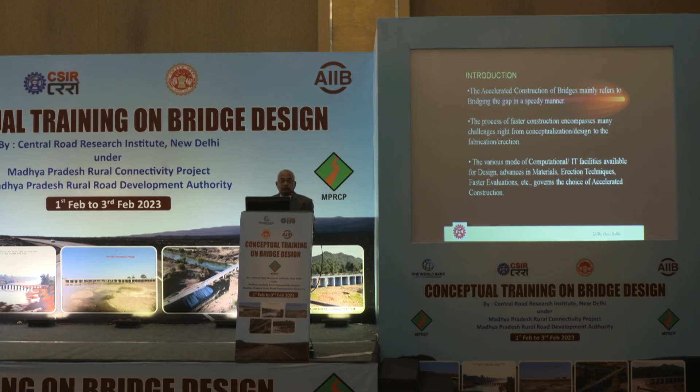Now, because of the various computational IT facilities available for design, advanced materials, erection techniques, and faster evaluations, all these factors govern the choice of accelerated construction, depending on the resources that you have.

On the basis of the resources, you can think of the type of material, like steel, composite, high performance concrete, or high grade steel. All these material advances govern the type of construction.

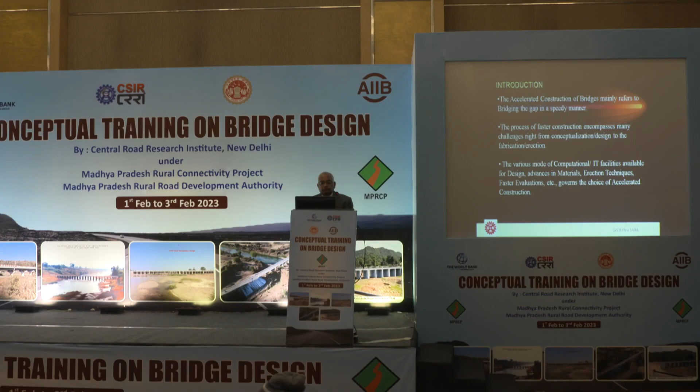IT facilities are very important because earlier we did not have fast computation methods. Nowadays we have very sophisticated software backed by IT tools and faster generations of computers. All these things make it very easy to implement such construction at site.

Obviously, when all these combinations come together, they give you the very good aesthetic appeal that you can always see.

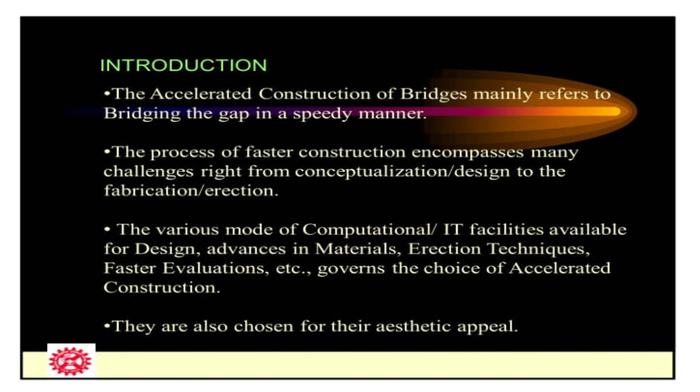Type of construction means segmental, built one by one in smaller segments of something like 3 to 4 meters in length or width, depending on the width of the carriageway - 2 lane, 4 lane, or 6 lane. For up to 6 lanes, you can go up to 14.5 or 15 meter segments, or even wider depending on the design and ease of construction.

Launching mechanism is very important because whatever segment you design, it should fit your cross section, and we have to see what launching mechanism is adaptable for that particular design. It all depends on handling convenience and the space available at site, since you have to construct in urban areas, at junctions, near ROBs, or railway crossings. All these locations create difficulty in deciding the launching mechanism because of space constraints.

Material should obviously have quick, long-lasting setting, extra high strength, and good evaluations. This is very important because it's one aspect where you have to maintain very good construction control, otherwise you may find both ends not meeting at the end of the day.

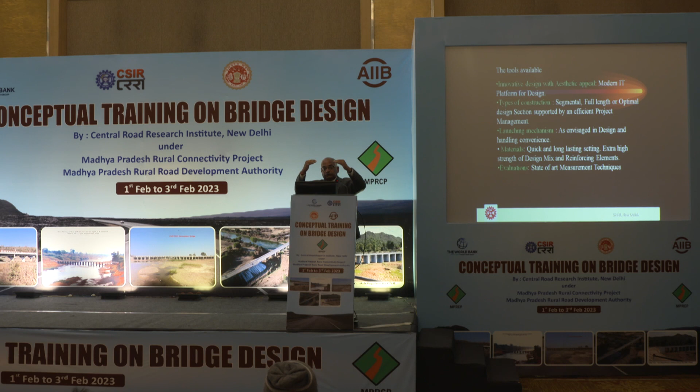You would have seen certain photographs on WhatsApp or elsewhere of bridges being constructed segment by segment, and when you reach the end, it should meet perfectly. If your measurement techniques are not good, or you're not able to control the construction sequence or the coordinates, both ends sometimes do not meet - then you have to make adjustments.

A lot of things go into the design also, because in a long span bridge, like 100 meters coming from that side and 100 meters from this side, a lot of shrinkage happens along the way. So you have to consider all these factors to make sure the meeting point comes close.

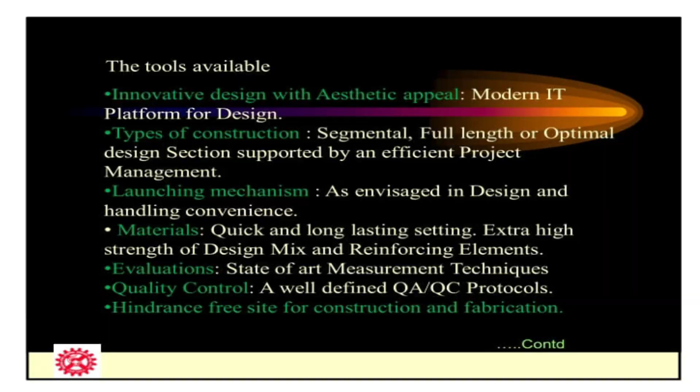Quality control, of course, you should have good QA/QC protocols. A hindrance-free site, as I told you—whatever site you select, it should be hindrance-free. It should also be safe from the traffic perspective, so that it does not cause any accident or loss of life.

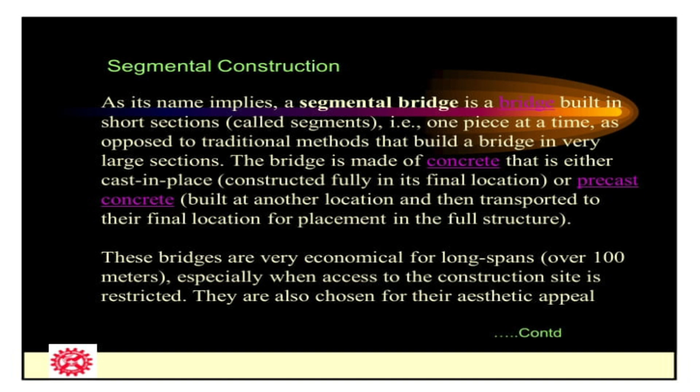As the name implies, a segmental bridge is a bridge built in short sections called segments, made of either steel, precast concrete, purely concrete, or composite material—any kind suited for the bridge location. As a thumb rule, these bridges are very economical over 100-meter spans, basically long spans.

We consider long spans for segmental construction, like balanced cantilever bridges—normally 65 meters on each side, meaning 130 meters total. So invariably you can find balanced cantilever bridges constructed across, for example, the Thane Creek Bridge in Bombay, or the Nivedita Bridge in Kolkata, where I was the project director in NHAI. I will show that example. All these bridges offer very good span lengths.

People thought, after the Second World War, that we should have faster connections, like in Europe. Europe was all fragmented into different segments, but after the Second World War, they became united. Unity doesn't come just like that—you have to have connections. Since there are large valleys separated by seas, they needed to connect them, so they thought of this technology after the Second World War. That is how all this advancement took place.

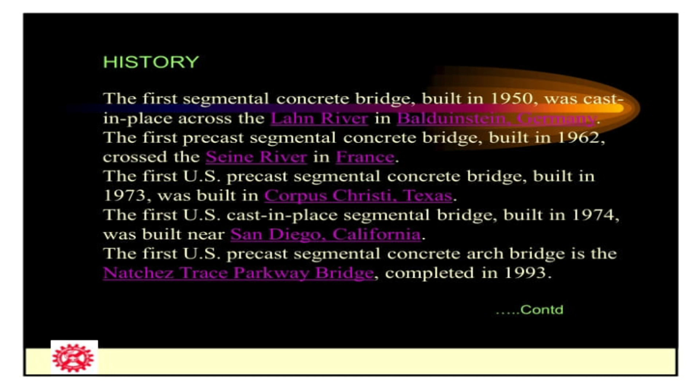Precast segments came in 1993, but this technology was basically developed long ago—it's not new. In India, if you look at our old historical temples, like in South India, they are also segmentally constructed. Imagine the Madurai temple, where they built segment by segment at the top, because there was no natural material like rock available. It was all constructed by our ancestors, and those technologies were available because they also had good construction control. Our old ancient Hindu temples had very advanced technology. At that time they did not have surveying equipment, but they definitely had something to control the construction.

In the 19th century and early developments, iron and steel truss bridge builders developed a method of constructing large bridges without the use of falsework. Nowadays we use a lot of falsework or erection technology, but in earlier days, they used permanent works as the falsework—they kept adding permanent works, and that became the structure. From that point onward, they started constructing the bridge, and the only precaution they took was to avoid tipping at the midpoints.

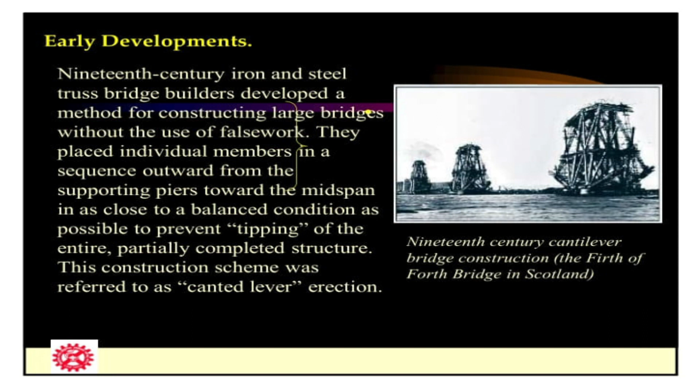In the 20th century, this cantilever method of building prestressed concrete bridges was developed. In India particularly, these balanced cantilever bridges used what is called Russian technology, where from 1971 to 1978, all these balanced cantilever bridges were constructed. It was a fashion at that time in the ministry to have balanced cantilever prestressed concrete bridges. I'll just skip this slide—you can look at it yourself.

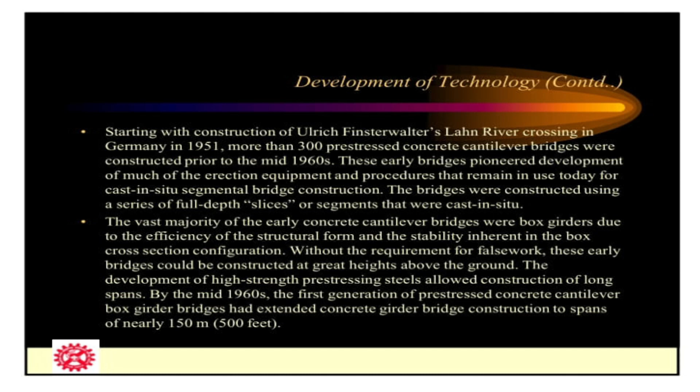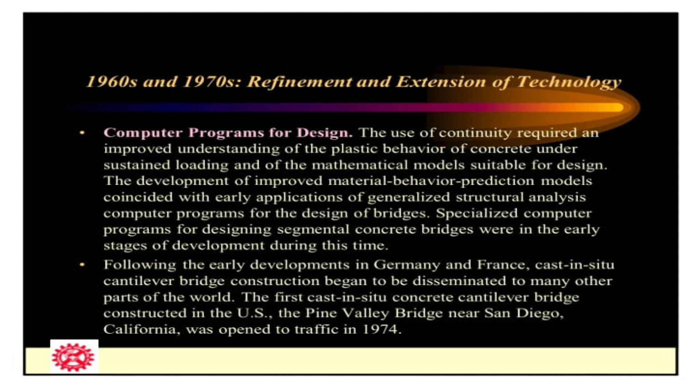After the 70s, people thought 150 meters is not enough—we should have even larger spans. But then the computational challenge comes in. You always have numerical methods, and they used to compute by hand. But for very large spans, like more than 200 or 300 meters center to center, they realized we need computational tools in hand to go for even larger spans. As computational technology improved after the 70s, a lot of new software started developing, and the computer age was also getting modified. This really facilitated computational methods and the implementation of bridges. Precasting, of course, offers a very good solution.

Because they can have good quality control in the plant.

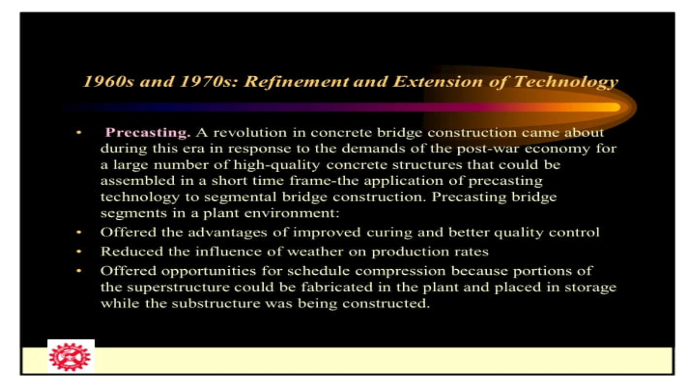Another challenge was how to transport precast segments to the site. This was a great challenge in India about 10 to 15 years back, because you have to have trailers something like 25 to 30 meters long to carry the segments, since your segment width for a 6-lane segment is almost 24 to 25 meters wide. So how to carry those segments?

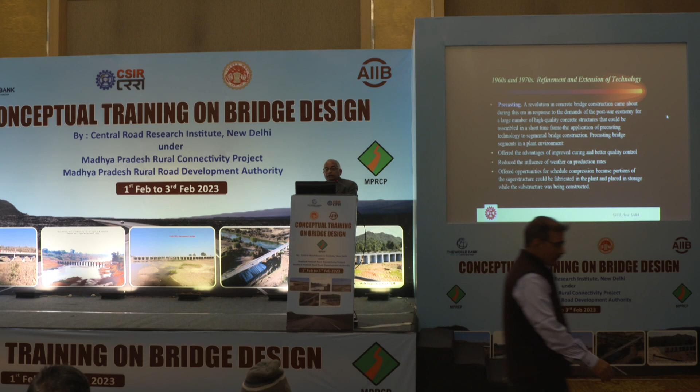I still remember when flyovers were constructed in Delhi in the middle of the 90s, we did not have a launching mechanism more than 25 meters. Imagine, there was no crane available in Delhi which could launch a single girder of more than 25 to 30 meters. That's the constraint we faced.

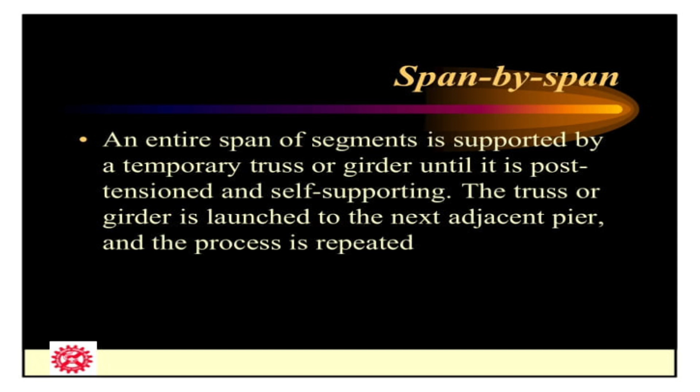So that is how the technology evolved. Now we are easily doing construction methods like span by span. This is the method where the entire span of segment is supported by a temporary truss or girder until it is post-tensioned and self-supporting, because then we take the advantage of pre-stressing. So you have a total span, one span of 25 to 30 meters, the entire span in one go, put it on the support, first temporary then permanent, and then pre-stress it, span by span.

You have the full truss giving full load on the piers. So piers have to be designed for that, because this is a design challenge - it has to handle both the temporary load during erection and then the permanent loads. So you have to design that way.

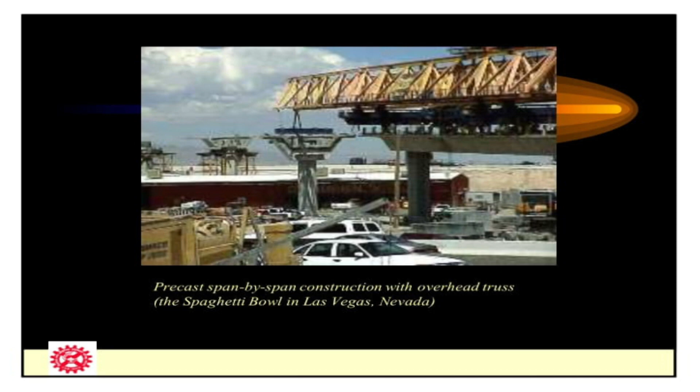And then you look at the traffic below. This is the challenge - God forbid an accident happens, but we engineers take the challenge, whatever it comes to. It has happened in Las Vegas, Nevada, US. Fortunately no accident happened, but it gives you the confidence that we can construct the bridge while not stopping the traffic also. That's the confidence one should have.

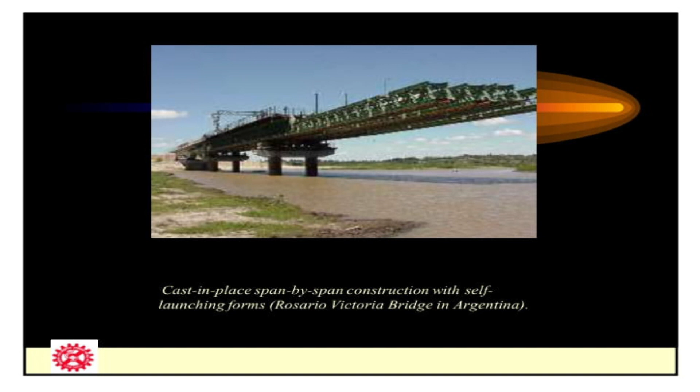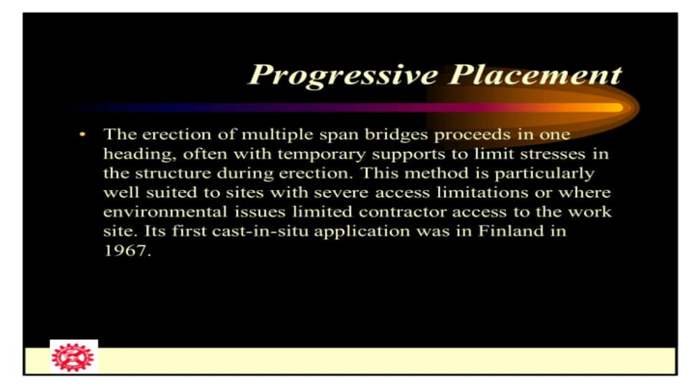Then there's cast-in-place span by span, like when you have a gantry available, you just move your truss and put it in place. Then progressive placement with multiple spans, where you're able to put multiple spans in one heading. Then incremental launching, with multiple spans one by one. I'll show an example rather than spend much time here.

Recently we had the bridge at Chenab, on river Chenab - this is the world's highest bridge in India. It is more than the height of... it's not that bridge, it's a different bridge. I could have included that slide but I have not. So that's one challenge India has accomplished.

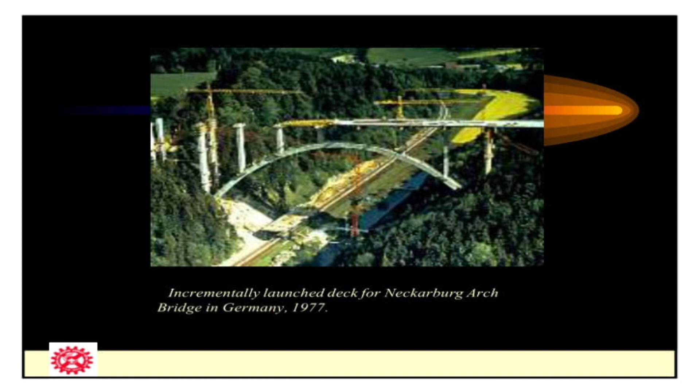So the normal sequence goes like: build the support towers and columns, build the temporary false work because you need temporary supports, then build the deck and perform the finishing work. If it is designed as pre-stressed, then go for post-tensioning.

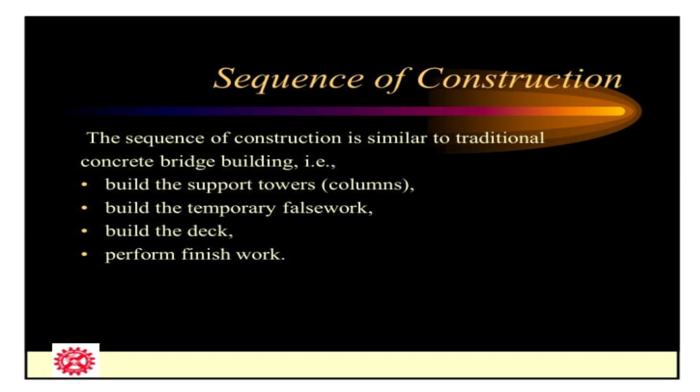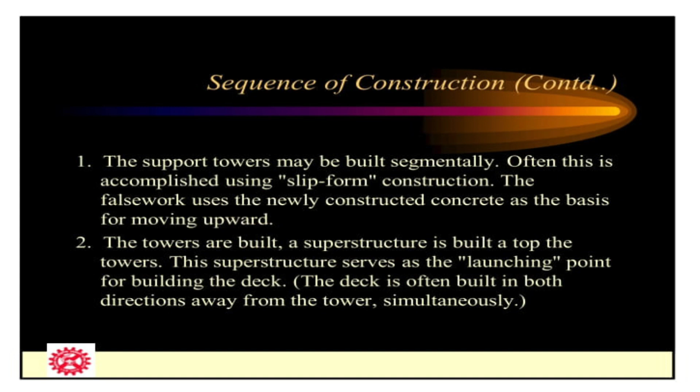Support towers can also be built segmentally, because tower height normally depends on your design of the bridge and the valley - support towers may be very tall, ranging from say 10 to 20 meters. This is often accomplished using slip forms, or you can use the one-pour method. Normally in metro pillars, which are not very high, they use the single pour method because it gives very good finishing - single pour pier, one cast.

So now coming to cost - actual cost of a segmental bridge can vary widely with considerations like span length. You have to select the span such that longer spans have higher per square foot cost, definitely it will have higher cost. Project size matters too - if it's a big project, a kilometer long or more than 1,000 or 2,000 meters, it gives economy.

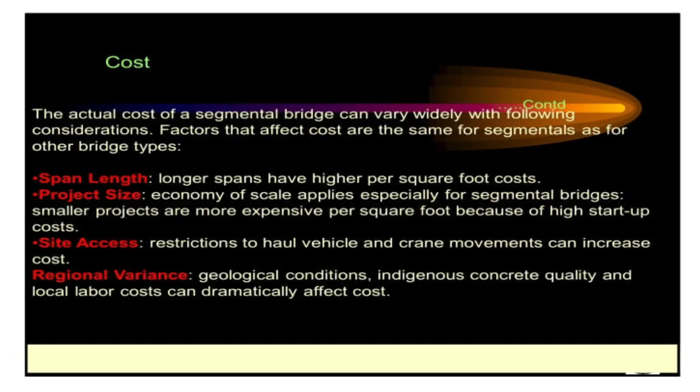Site access is very important, especially in urban areas - you have to really see that the segments you are carrying to the site are approachable, that you have trucks which can really ferry your segments. Then geological condition - you should not have too much rain, or if it's hot and humid, you should also consider that in your design.

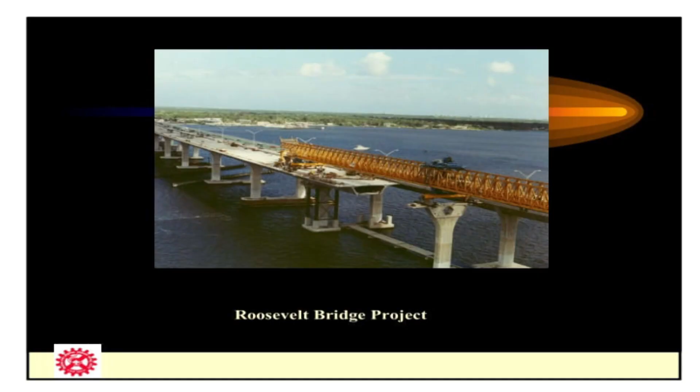This is another method, span by span like that. Look, this is a 298 meter span - this is the Roosevelt Bridge.

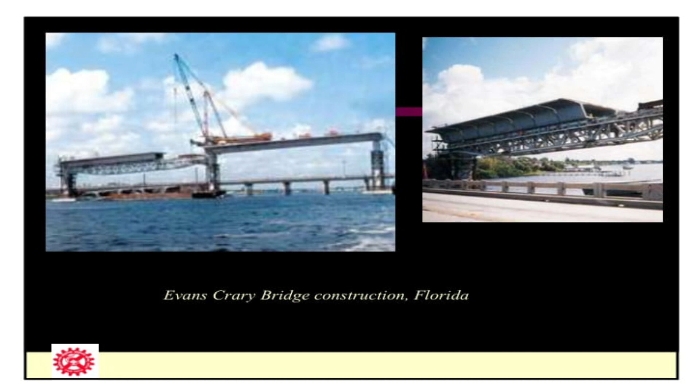In Florida, you can see one temporary support. All these spans are ferried.

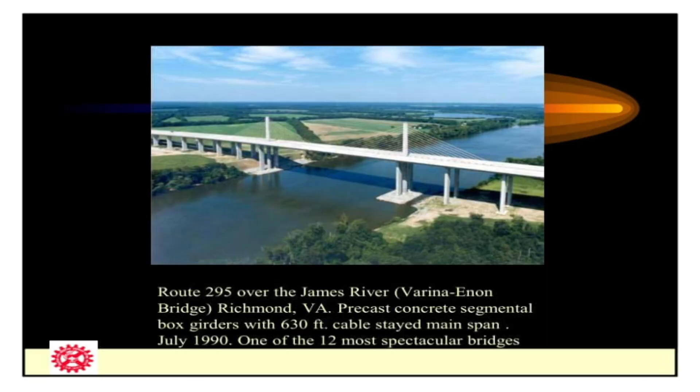Here you can see, like in India, we used to have a bearing or expansion joint at the tip. But here they use continuous construction to avoid the expansion joint, like modular expansion joints, as Mr. Garwar was mentioning. So we try to avoid that as much as possible.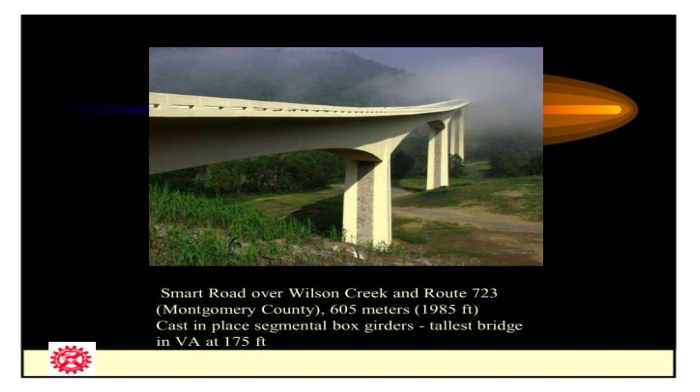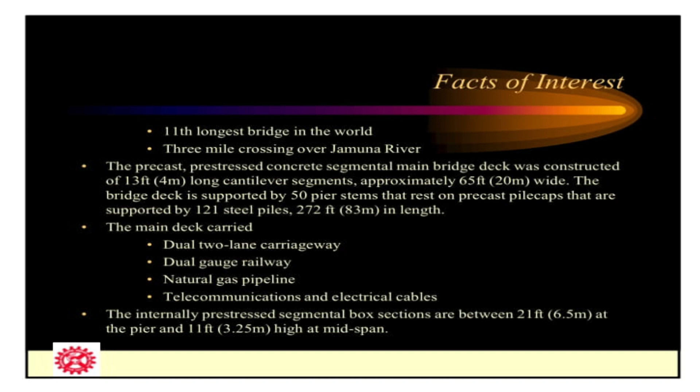You can see the cross section. It's about a 6.5 meter box, like that.

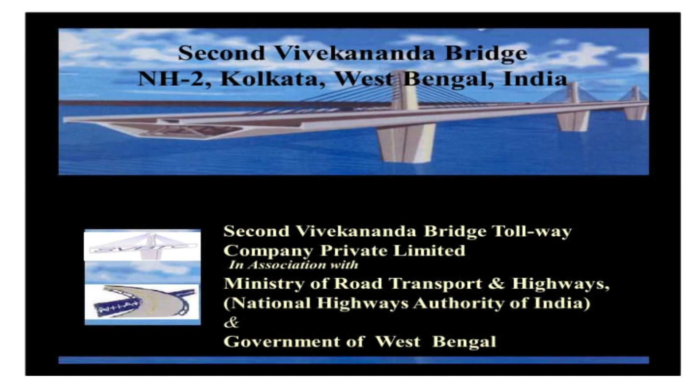This is one bridge that, in fact, is my own personal experience - we constructed the Second Vivekananda Bridge. If you have gone to Calcutta near Dakshineshwar, there was an old bridge, Bali Bridge. In parallel to Bali Bridge, we constructed this bridge on NH2, Dankuni Junction. This was part of the Golden Quadrilateral, and this was the first project built on a build-operate-transfer basis, BOT basis - the first standalone bridge project in India.

It was constructed by Parsons Brinckerhoff of US, and the client was NHAI. Fortunately, I constructed this bridge as project director up to 60% of the progress of the project.

It's a huge bridge - the main bridge is 880 meters, single lane to 6-lane bridge, with 11 spans, totaling 6.1 kilometers including the approaches and approach viaducts - 2-lane, 4-lane, 6-lane. This bridge has all the features - it has an extradosed cable stay bridge, 2-lane segment, 3-lane segment, 6-lane segment, I mean everything.

It has an ROB, it has underpasses - all possible combinations of technology have been used in this 6.1 kilometer construction. At that time it cost something like 600 crores.

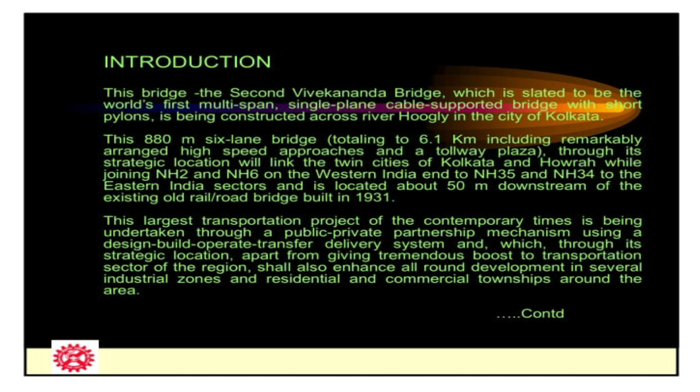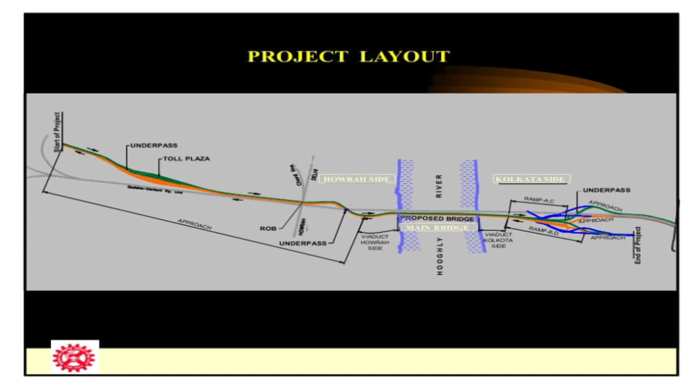This is the proposed site. This is the start of the project. From this side, it's the end of the GT road - from your Amritsar or Peshawar to Calcutta, the old GT road ends here, and this is where the project starts.

Then there was a toll plaza, 16 plus 16 lane toll plaza. Then this is the main bridge here. There was already a bridge, Bali Bridge.

On this side, there are a number of viaducts taking different routes. This is also a place where the Howrah main chord line is coming into Calcutta, so a lot of railway lines are also coming at the junction. So you have a lot of underpasses and ROBs.

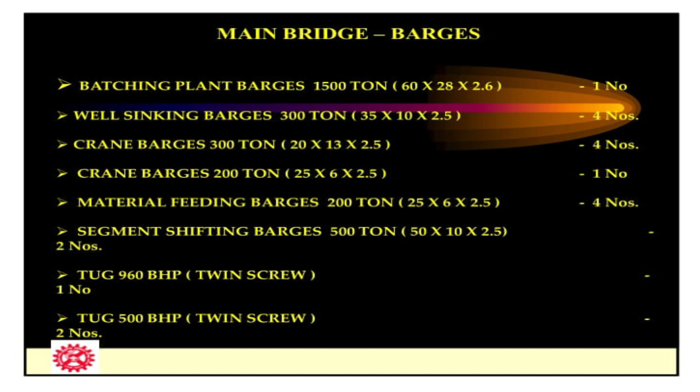So total work - you can say the piling was about 30,000 running meters. Now, it's a huge work. This is all matter of detail, which I will not go into.

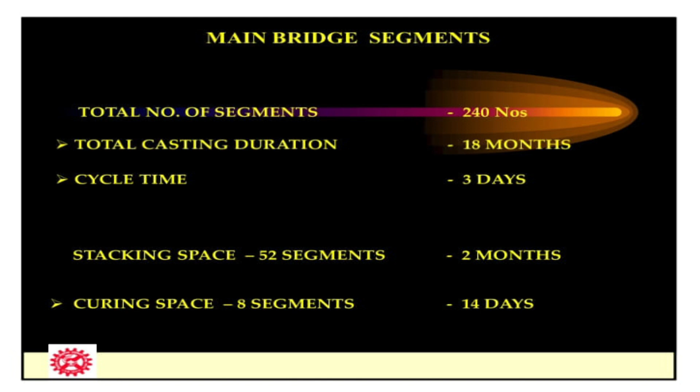You can see the main bridge - it's all a precasting yard that was done. Total number of segments are 240 for the main bridge. Casting duration was 18 months - this whole job had to be completed in 18 months.

You can imagine - another bridge at Calcutta took 20 years to complete, and this bridge, the main bridge, was to finish in 18 months. So you can imagine the kind of speed that was required to construct this particular bridge.

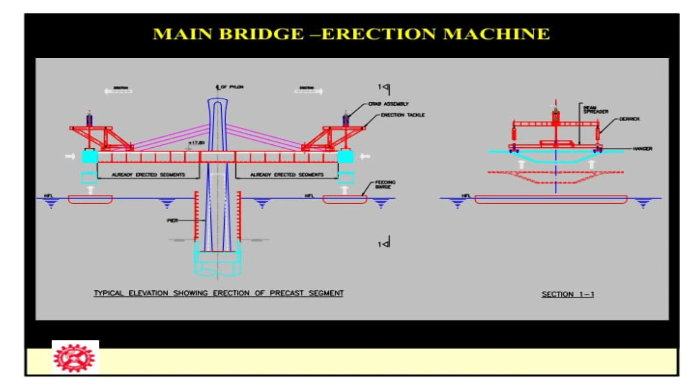This is the main bridge, you can see - this is the pylon, and this is how the segments are placed. I'll show in detail - this is the steining, this is the well cap, this is the well foundation.

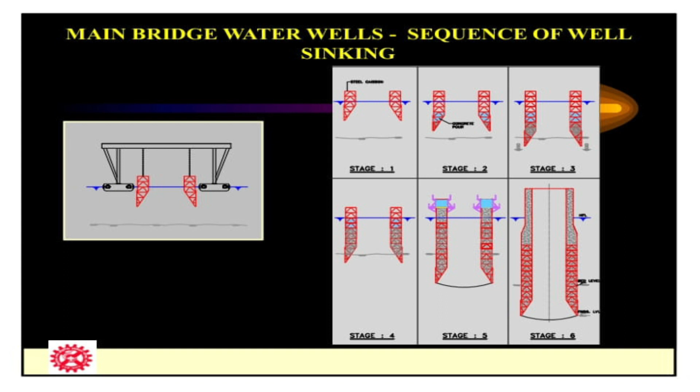It is all placed for the well foundation. You can just look at here - this is the cutting edge towed by a separate mechanism, and this is how the well steining is added segment by segment. Look, this is the photograph.

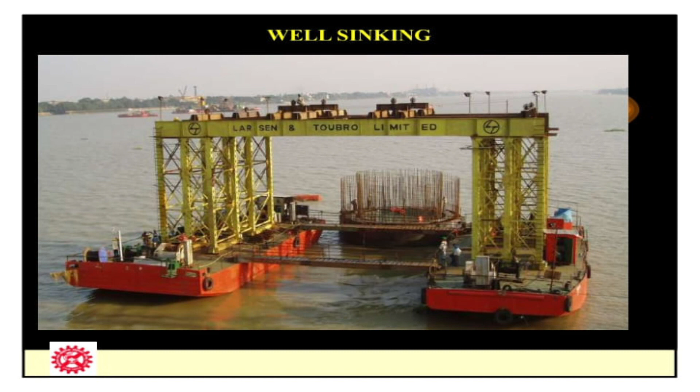Match cast technology means - you have a different horizontal profile of the bridge, and the longitudinal profile is different. You have different segments, but they have to form a specific profile, so unless the previous segment matches the next one, you cannot control the profile. So that is how the staging works - you have to tweak every time to match the previous segment.

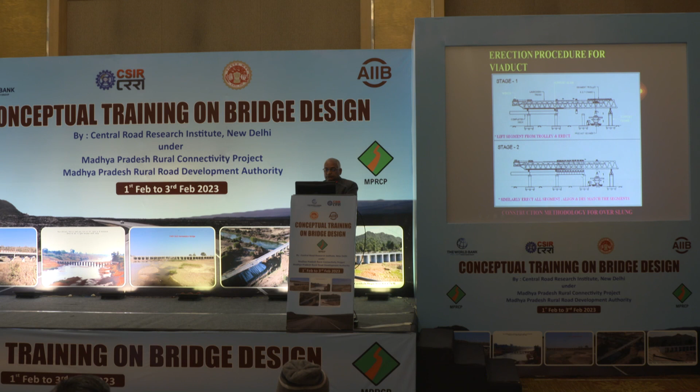Once this is done, all are in perfect line, then we go for pre-stressing. After pre-stressing, we see there is a small curvature on the surface of the span, and the load is now self-supported. Then we remove the truss, and it is moved onto another pier, like that.

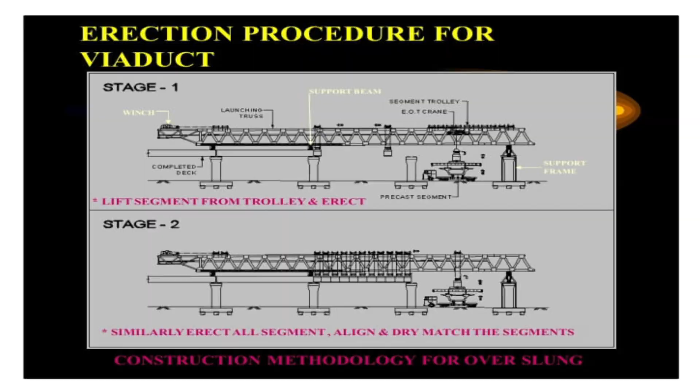There was an underpass, like in Dakshineshwar, where there was already a train line. There were a lot of railway lines, and the railway never allowed the traffic to stop because it's a huge loss to them. So in running condition, we undercut the embankments to facilitate the viaduct movement.

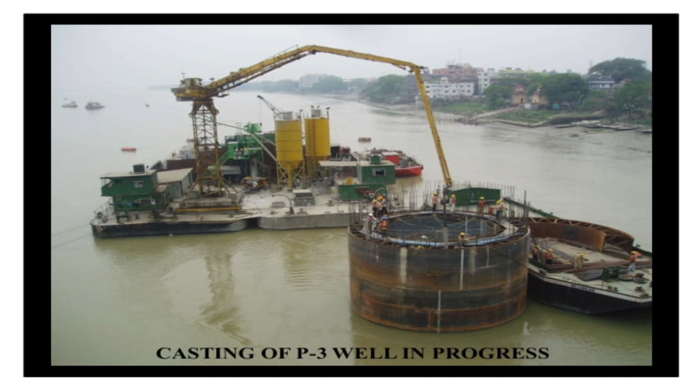To speed up construction, the contractor was directed to have a floating batching plant. It was the first such thing seen in India at that time, 20-21 years back, with the floating barge. This floating barge carried all the material, and casting was done simultaneously with the help of concrete pumps.

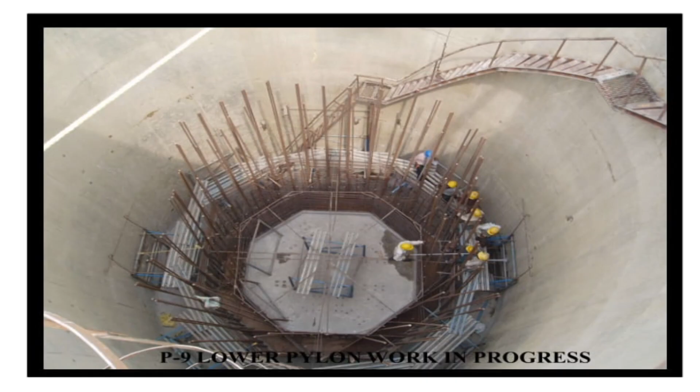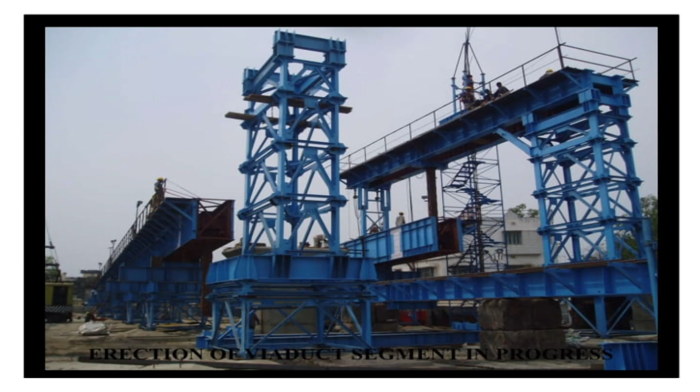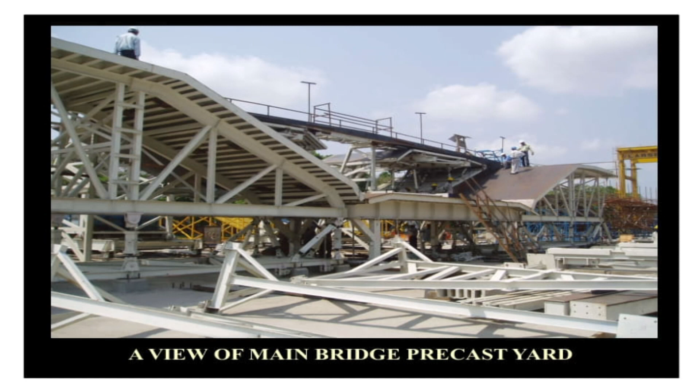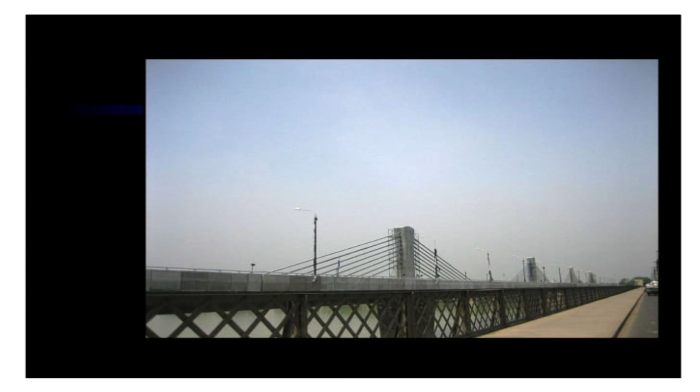This is the portal truss. You can look at the old bridge, this existing bridge having both railway and road traffic. This is the 6-lane segment concreting. After construction of the pylon, this is the cable, the extradosed cable. This is the view of the finished bridge. So that is how that construction was done.

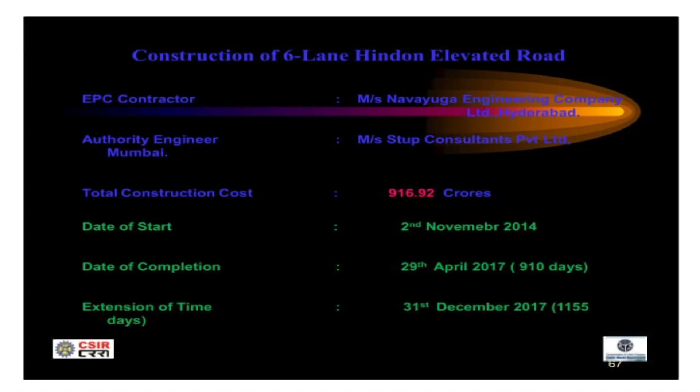There is another case study which we have done at Ghaziabad. Our CRRI was associated with the construction control and quality control of that particular 6-lane road at Ghaziabad, constructed by Navayuga Engineering. It is the first longest elevated road in the country, a 6-lane road on a single pier. This is also a very good construction.

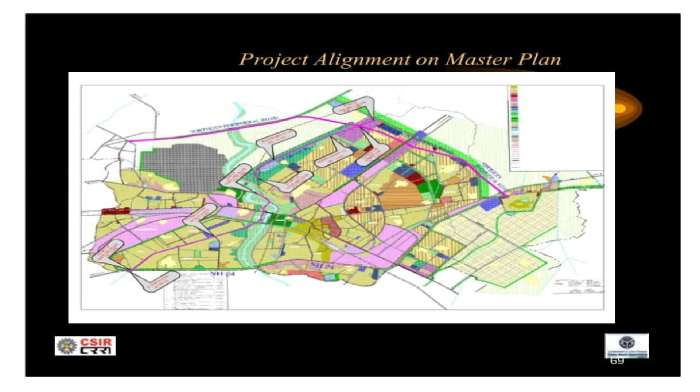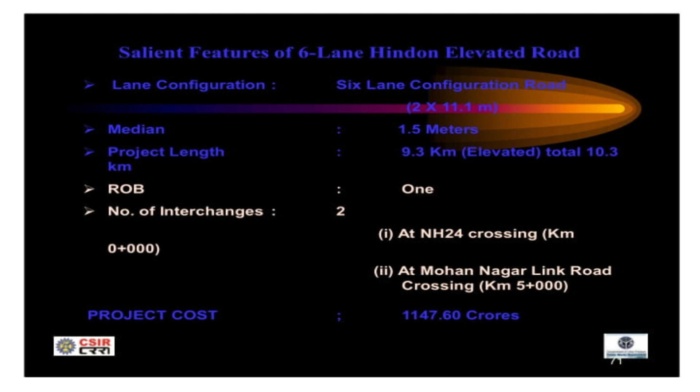You can look at the index map. This connects Delhi from the Yamuna side, from the Gazipur border to Ghaziabad, a 9 kilometer long corridor. It's a 6-lane configuration, 2 into 11.1, 22 meters, with a median of 1.5 meters, and the project length is 9.3 kilometers. Total cost is about 1,000 crores.

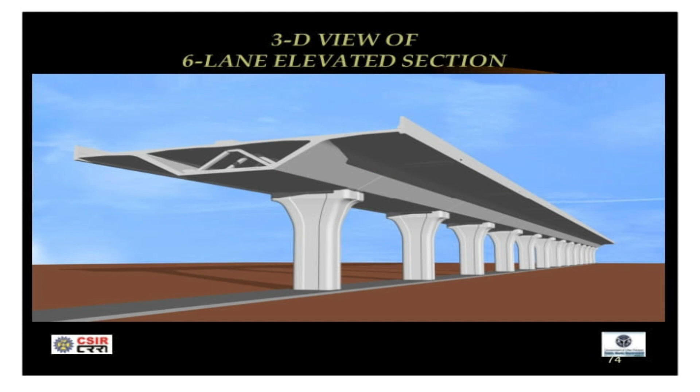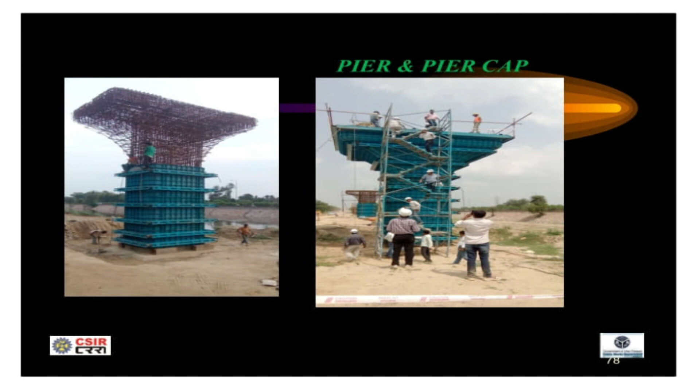This is the typical cross section. You can see the 6-lane segment resting over the pier. This is how one segment looks. The sequence of construction of piles has already been explained to you. Open footing was also used at some locations. The pier is done in a single pour, with the entire cage cast in one go.

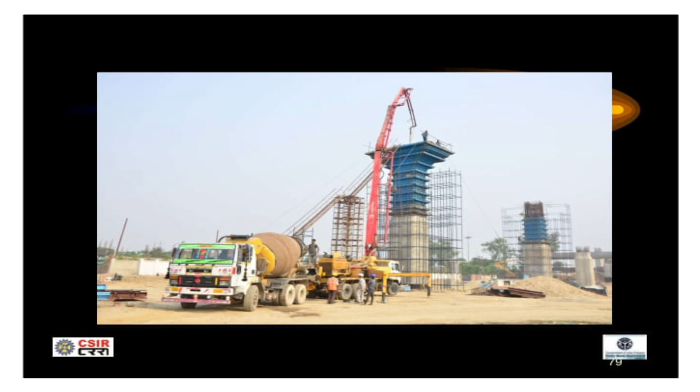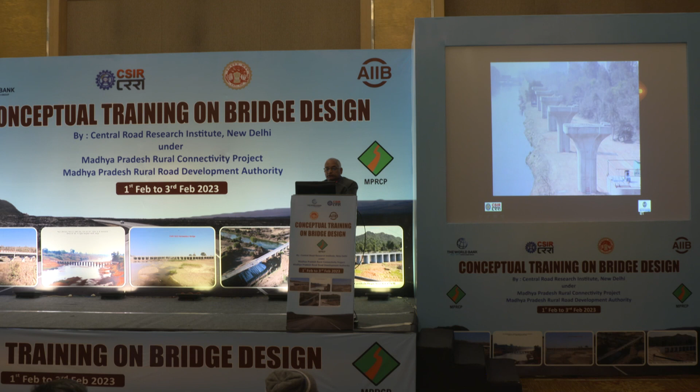There are tall piers also, done in 2 stages. The pier cap is all along the Hindon Canal, this is the Hindon River or canal you can see. All along the Hindon Canal this construction was done. You can see the kind of subsoil conditions and the geotechnical investigation that must have gone into stabilizing these foundations.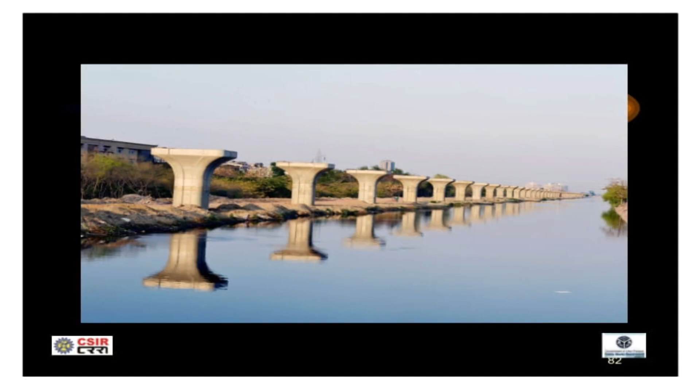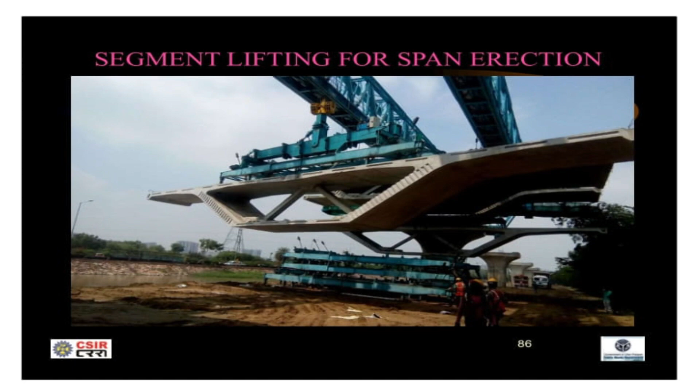Here, the same match cast segment technology was used for the 6-lane segment. This is the view of the casting yard, and this is how all these segments were placed from the gantry at the top.

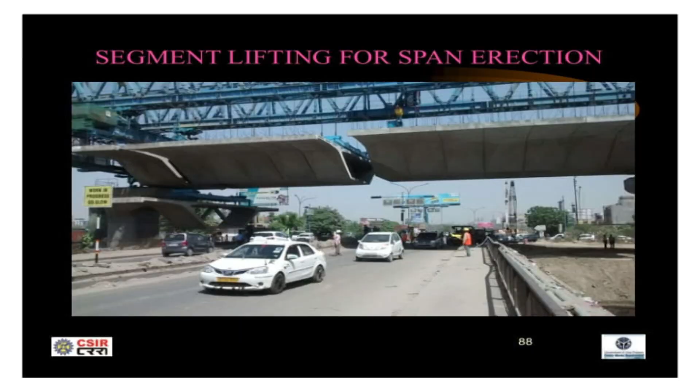Look at the construction sequence, just look at the traffic. Traffic is going on. It's not only abroad but also in India that our engineers are confident to take this challenge and not stop the traffic, because stopping traffic is a big challenge in such a huge environment, with almost 60-70,000 PCU traffic.

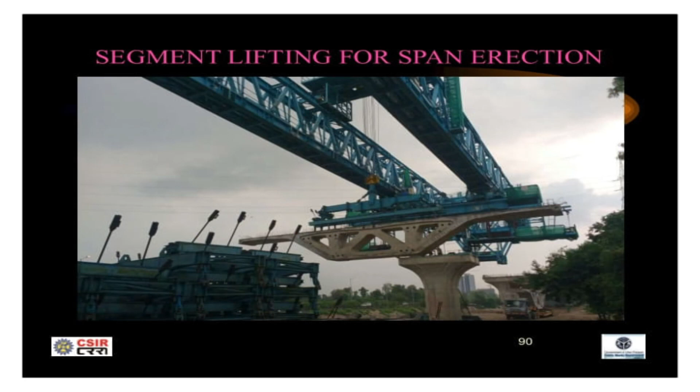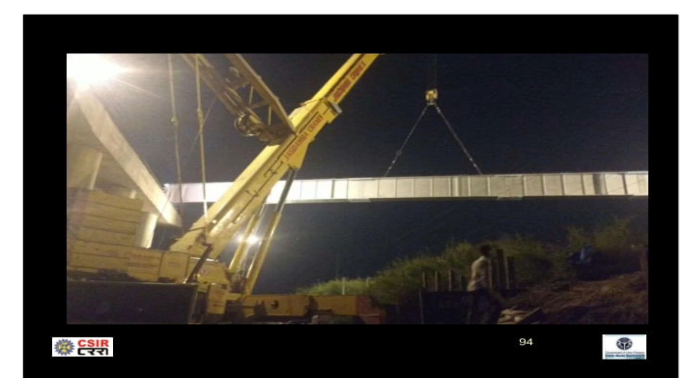This is the casting of ancillary works. Then this is the ROB, a 6-lane ROB, which was a composite construction done with steel girders, on the Hindon crossing. Huge work.

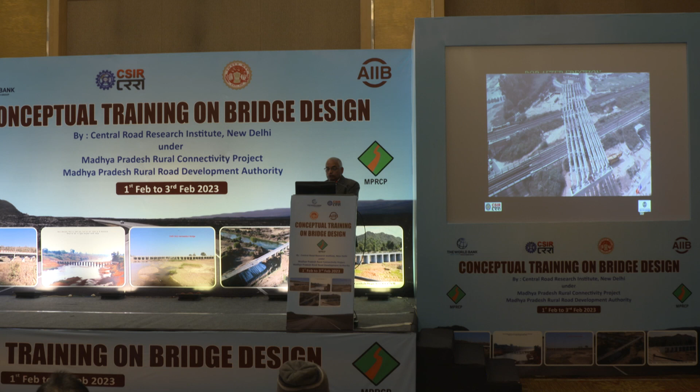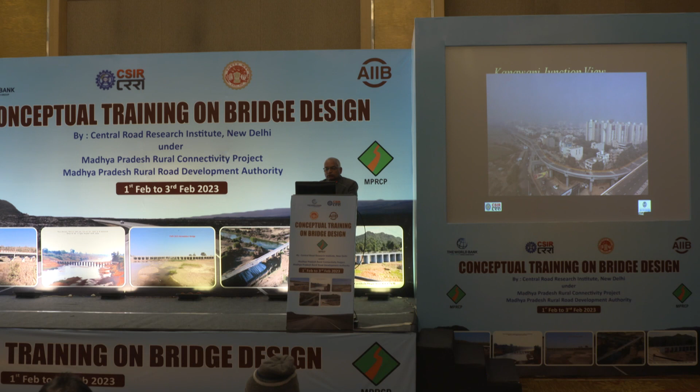The CRRI team was always available at the site for quality construction and construction control. This is the finished view of the elevated road. This is how you have to take the challenge, and this is how the construction technology has to be improvised upon. This is the finished view, and with that I conclude my presentation. Thank you.